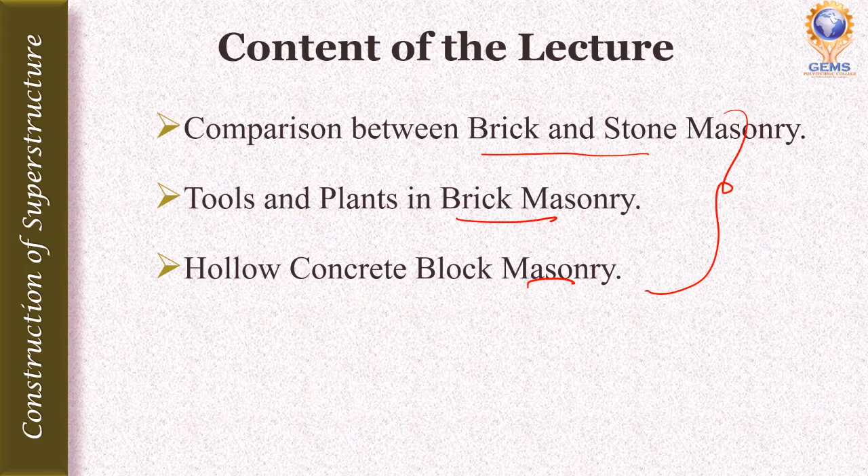First, we start with the comparison between brick and stone masonry. Brick masonries are of uniform shape and size, whereas stone masonries are not uniform in shape and size. Brick masonries are light in weight, but stone masonries are heavy in weight.

Bricks do not require any dressing, whereas stone requires dressing. Bricks are easily available, but stones are not easily available. We have to quarry them from the mountain and dress them, so this is a complicated process. Stones are not as easily available as bricks.

Laying is easy in brick masonry compared to stone masonry. If you compare, laying of brick is easier than stone masonry. But stone laying in stone masonry is not easy, it is a very tough one.

In brickwork, mortar joints are thin, but in stonework, mortar joints are thick. They are not thin, it is a thick mortar joint.

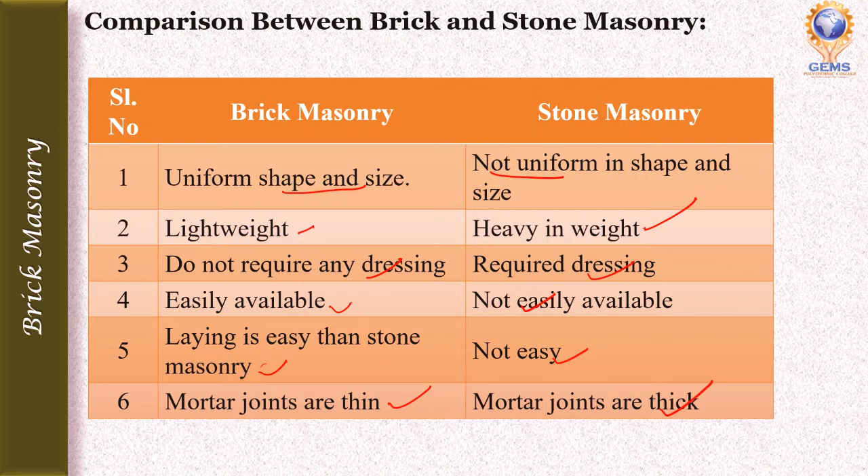Brick masonries are less watertight, whereas stone masonry provides better water tightness when compared with brick masonry.

Brick masonries have good fire resistance compared to stone. Stone does not have good fire resistance when compared with brickwork.

The cost of construction of brickwork is less, while the cost of construction of stonework is more. But brick is not much strong, whereas stone masonry is much stronger than brickwork.

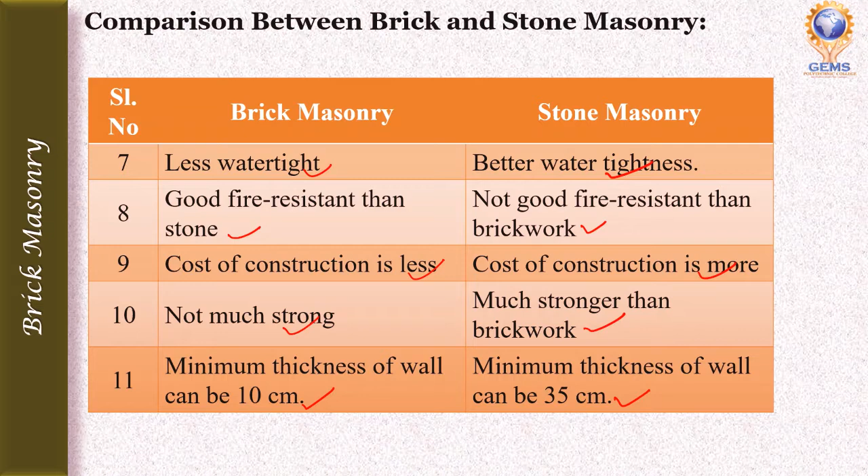The minimum thickness of wall in brick masonry can be 10 centimeters, whereas the minimum thickness of wall in stone masonry can be 35 centimeters. So these are the comparisons between brick and stone masonry.

Next heading is tools and plants in brick masonry. The first tool is the trowel, which is a triangular shaped tool, as shown in the diagram. The use of this triangular shaped tool is to pick up mortar from a board, and once picked up, to place and spread the mortar onto the brick or sets of bricks. We can also use the trowel to secure a brick into mortar by tapping. These are the uses of trowel in brick masonry.

The size of the trowel can vary, reaching up to 11 inches in length and 8 inches in width. Mostly, masons prefer to use short and wide trowels, since they do not put excessive stress on the wrist.

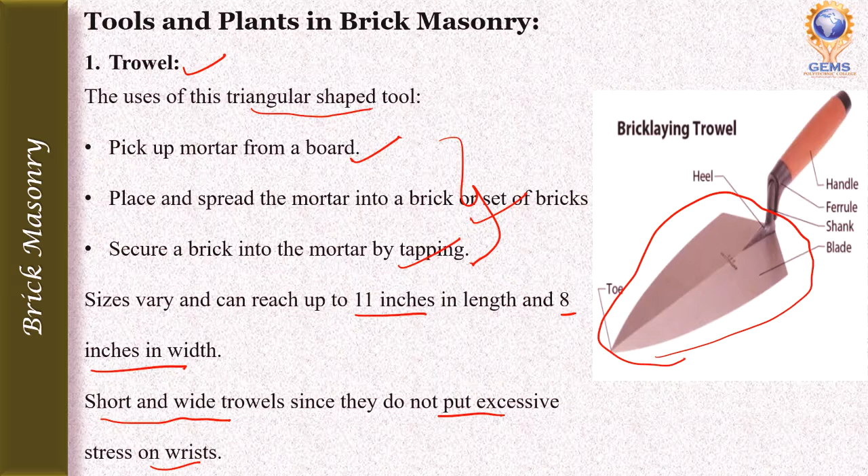The second tool is chisels. These chisels are used to cut the brick into specified sizes. There are wide ranges of chisels available, from 2.5 to 4.5 inches. The diagram shows the different shapes of chisels available.

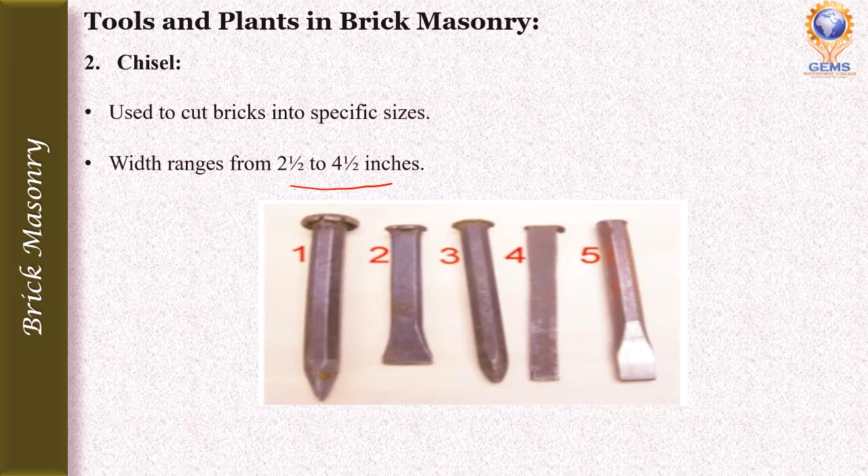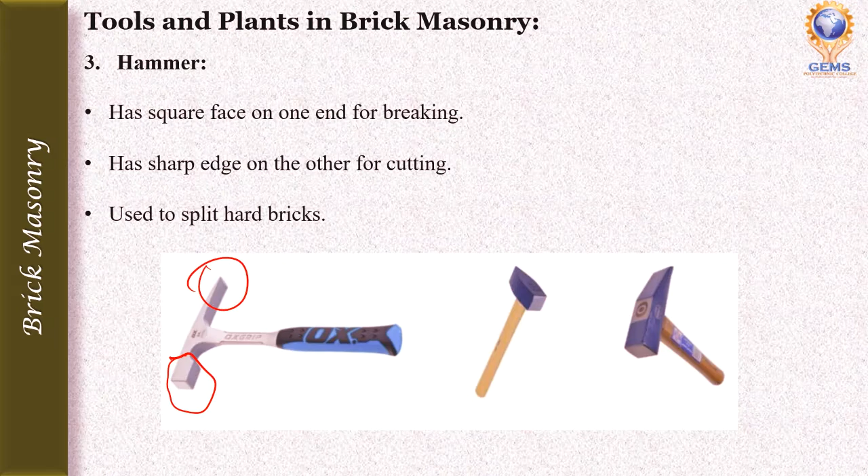The third tool is the hammer. A masonry hammer has a square face on one end, used for breaking, and a sharp edge on the other for cutting. Sometimes it is also used to split hard bricks. So this is the use of the hammer in brick masonry.

Next is the jointer. A jointer is used to make mortar joints. There are various types of joints: flat joint, point joint, and rounded joints. Its main function is to make mortar joints in brick masonry.

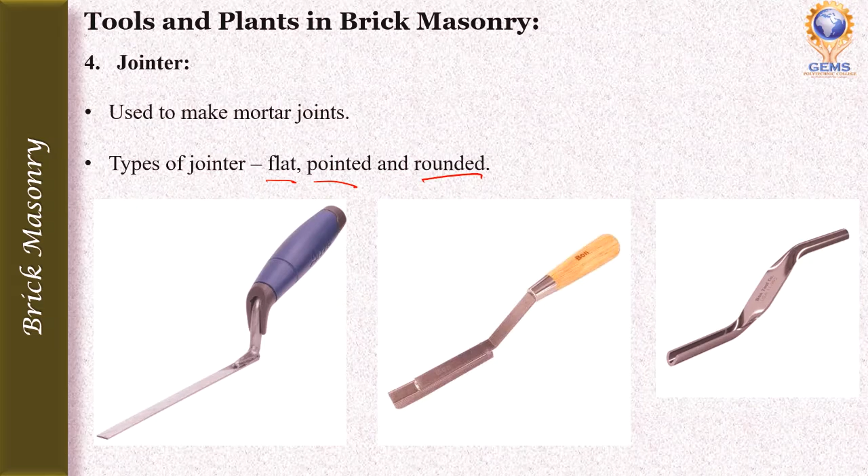Next is the square, a tool used when constructing and measuring right angles and for corner layouts. If you want to construct and measure right angles as well as corner layouts, you use this square. These squares are usually made of metal because of its durability. If made of plastic or any other brittle material, it will break easily. That's why squares are made of metal for durability.

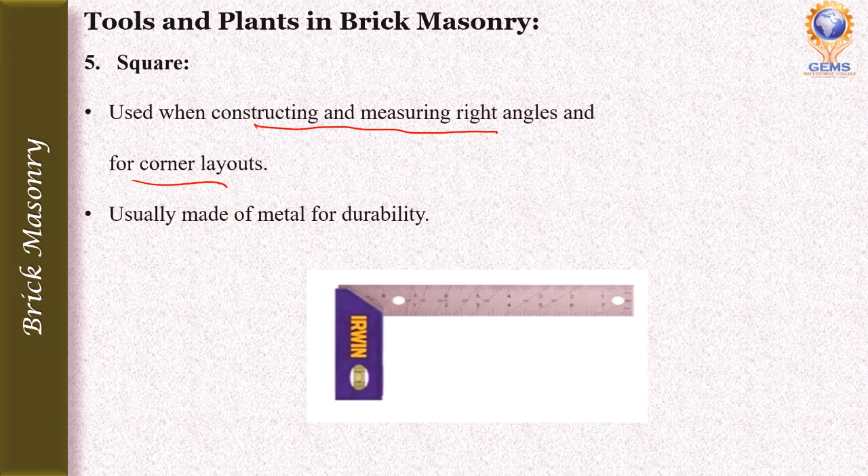The sixth tool is the mason's level. A mason's level is used to establish vertical or plumb lines and horizontal or level lines, such as when creating a vertical or horizontal line in a brick wall.

Mason's levels are made up of wood, metal, or a combination of wood and metal, and they come equipped with a single or double vial. This part is the vial, a small glass mold that consists of some liquid—mostly spirit levels.

The mason's level is preferred by most masons since it can be used for both horizontal and vertical measurements. Many masons prefer this level because with it they can measure both horizontal and vertical levels.

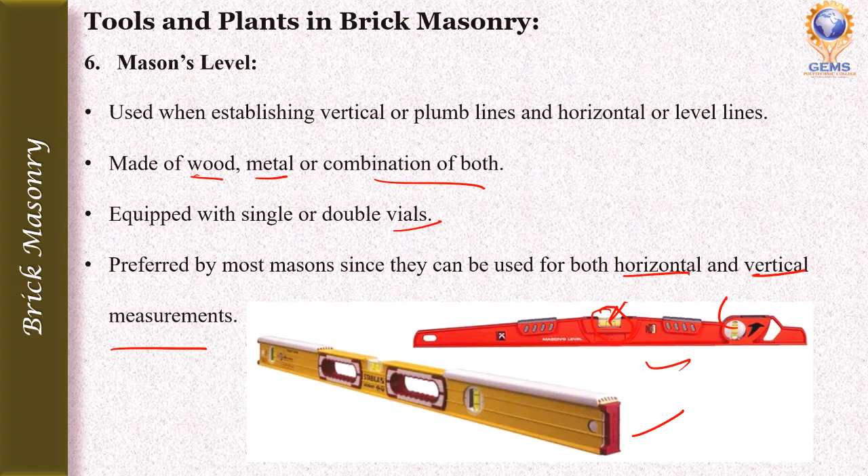The seventh tool is the straight edge. It acts as an extension to mason levels and is used when the level is shorter than the area that needs to be measured. So if you want to measure a larger area but your mason level is too short, you use this straight edge.

The width of this tool ranges from 1 1/8 to 1 1/2 inches, and it can be as long as 16 feet. This is the function of the straight edge.

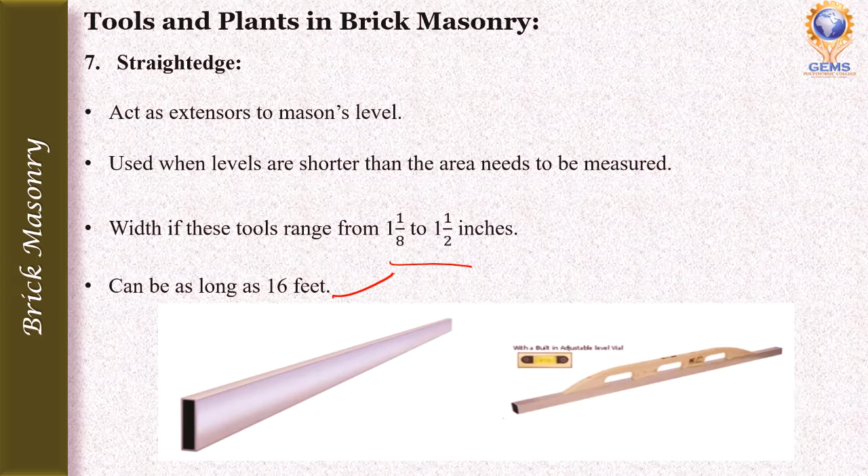The eighth and last tool is the plumb bob, also called the plummet. It is a weight, usually with a pointed tip on the bottom, suspended from a string, as shown here.

It is used as a vertical reference line, or plumb line, in the wall. This plumb bob is used to check the verticality of the wall—so if you want to check the verticality of the wall, you use the plumb bob.

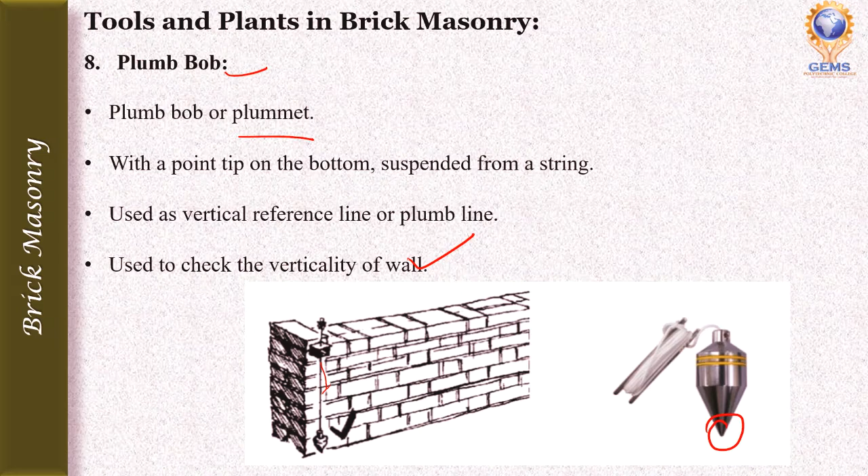So these are the tools and plants used in brick masonry.

The last topic in this video lecture is hollow concrete block masonry. We have all seen these hollow blocks in day-to-day life, and nowadays many buildings are constructed using them. It has a central hollow gap, which is why it is called hollow concrete block masonry.

A hollow concrete block is a large rectangular block used in construction. It is made up of Portland cement and aggregate, usually sand and fine gravel, for high density blocks.

This cement concrete is widely used for construction purposes due to its various advantages over other building materials. These hollow concrete units are manufactured from lightweight aggregates, so they can be used for both load bearing and non-load bearing walls.

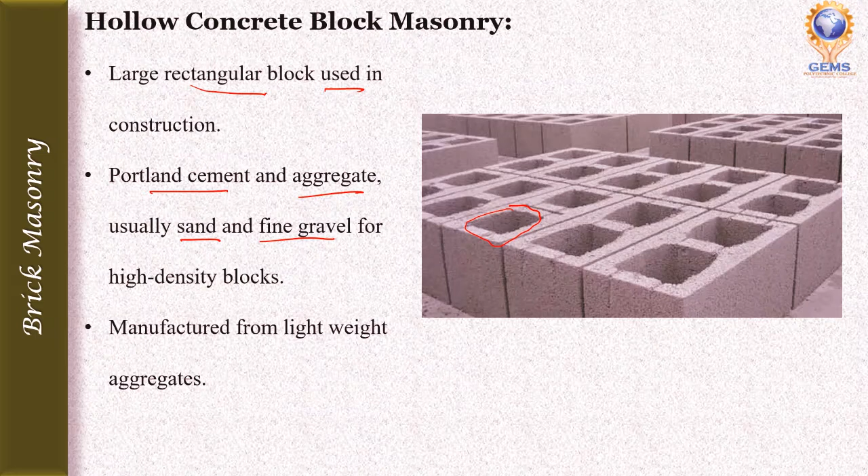The concrete blocks are molded in machines in various standard sizes. The standard size of a hollow concrete block is 39 centimeter by 19 centimeter by 30 centimeter.

If you are using a hollow building tile instead of a block, its size is 39 centimeter by 19 centimeter by 20 centimeter, with reduced height or thickness. If the same hollow concrete block is used for partitions, the thickness is reduced further to 39 centimeter by 19 centimeter by 10 centimeter. Only the thickness varies among the three standard sizes, not the length and breadth.

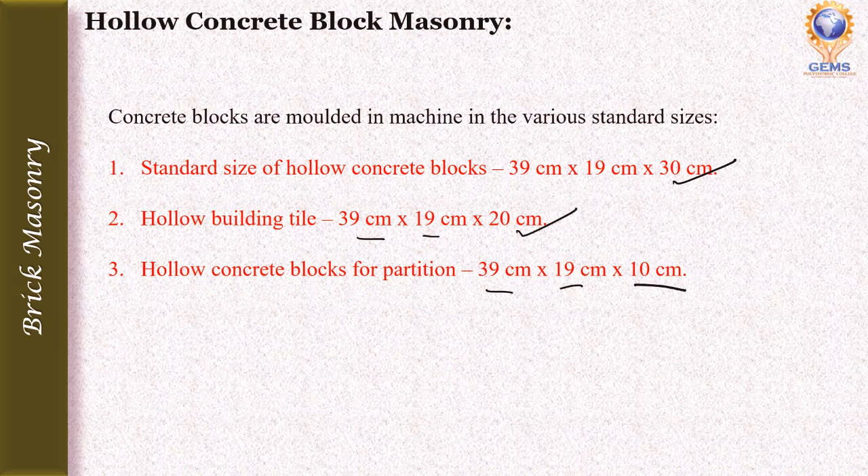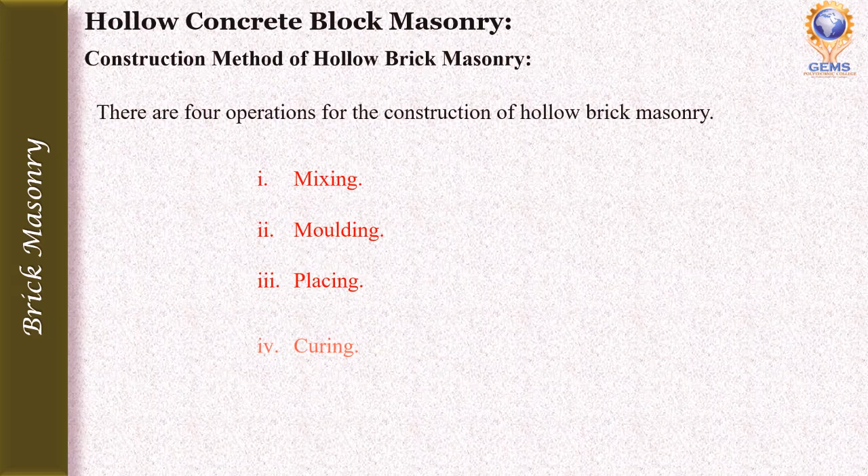What is the construction method of hollow concrete brick masonry? There are four operations in this construction: first mixing, second molding, third placing, and fourth curing. Let's see them one by one.

The first is mixing. In this step, we see how the materials are mixed to make hollow brick masonry: cement and aggregate are mixed properly.

So the ratio of the cement and aggregate should not be less than 1:6. So if you use 1 pot of cement, we have to use 6 pots of aggregate. We should not use less than a 1:6 ratio.

So in the aggregate ratio, the ratio of fine aggregate and coarse aggregate is 6:4. So 6:4 means we have to use 6 pots of fine aggregate and 4 pots of coarse aggregate. The size of the coarse aggregate is 6 to 12 mm only. If it is more than 12 mm, we can't use it in the manufacturing of hollow brick masonry.

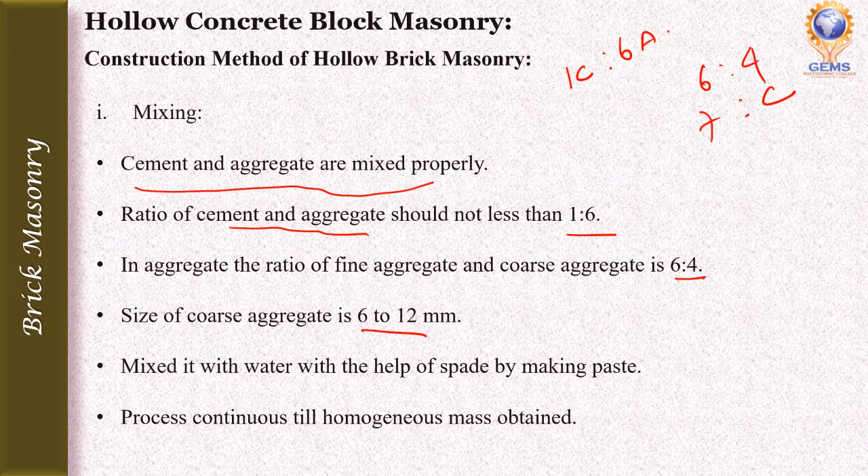Before adding water, the cement and the aggregate should be mixed properly with the help of a spade. Then we have to add the water into this mix of ingredients, and we have to properly mix it up to making them into a paste form. This process is continued till a homogeneous mass is obtained.

The second one is molding. So after mixing is over, the concrete paste comes under the next operation, that is called molding. So molding is done by hand casting or machine casting. Machine casting is preferable because it provides a better finish. So see in the picture, this machine is molding and placing the hollow blocks.

Okay. Third is placing. After molding, the concrete paste is taken out of the mold, and it is placed gently under shade without disturbance for 24 hours. We do not disturb this mold for 24 hours. We have to keep them in the shade.

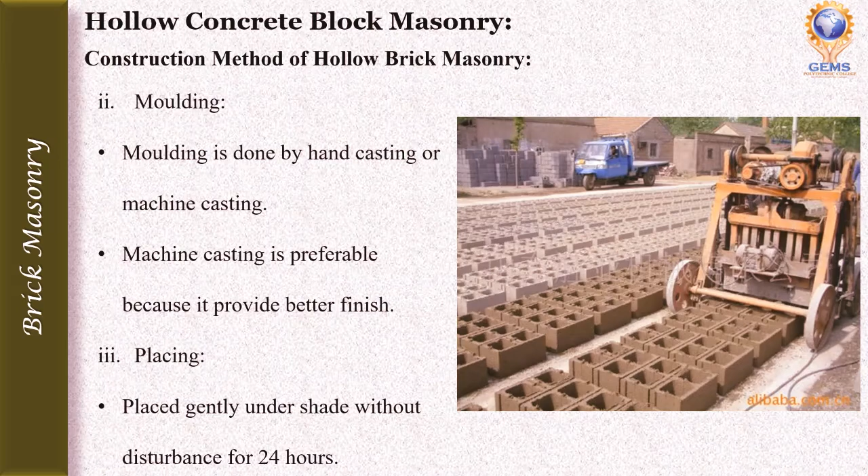After placing, we have to cure the hollow blocks. So after 24 hours, concrete blocks are soaked or immersed into water for a period of 1 week. So 1 week is the period for curing. Sometimes the curing is also done by pipes. The compressive strength of these blocks is 30 Newton per mm square after 28 days. So this is the compressive strength of the hollow concrete blocks.

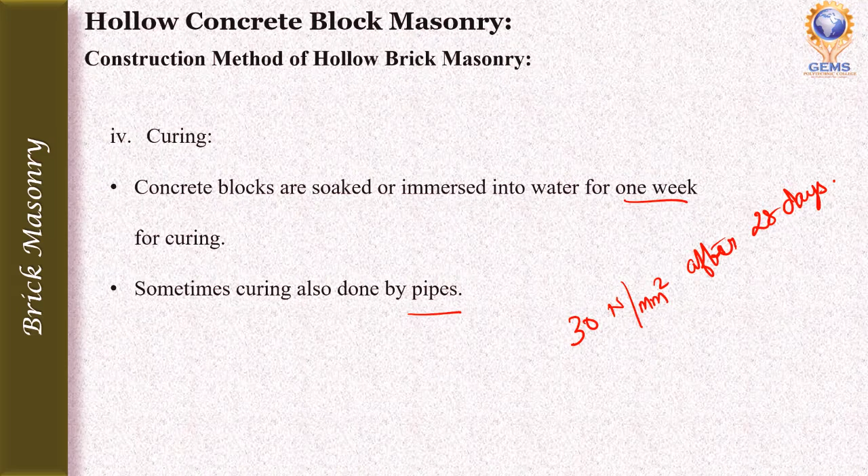So where are these hollow blocks used? These hollow blocks are generally used when the construction is required to be rapid, because these blocks' lengths are more than the size of the bricks and stones, so it requires fewer joints. So if you want your construction to be finished quickly, we can go with the hollow concrete blocks.

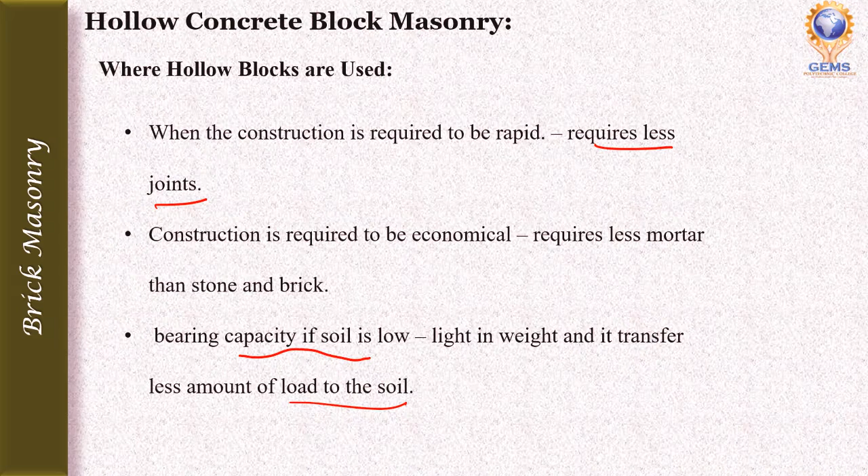And the second is when the construction is required to be economical. So if you want your construction to be very economical, then hollow blocks are used because they require less mortar than stone and bricks. Third one is when the bearing capacity of the soil is low, then hollow bricks are used because these hollow bricks are light in weight and transfer less load to the soil compared with bricks or stone. So in these three areas we will use the hollow blocks.

What are the advantages of hollow concrete block masonry? The durability and capacity to resist wear during handling is more when compared with brick and stone. The concrete block walls are stronger than brick or stone walls. And this concrete block wall saves binding material. It also saves the cost of labor. It has great resistance to fire and insects, and resistance to atmospheric influences, because concrete blocks are harder and denser than bricks.

Plastering can be eliminated because concrete blocks have the same color as cement plaster. So concrete blocks will have the same color as the cement, so we can eliminate the plastering work. The wall constructed with hollow blocks produces great insulation against heat, damp and sound. And these blocks are also advantageous for supplying wires and pipelines. So these are the advantages of the hollow concrete block masonry.

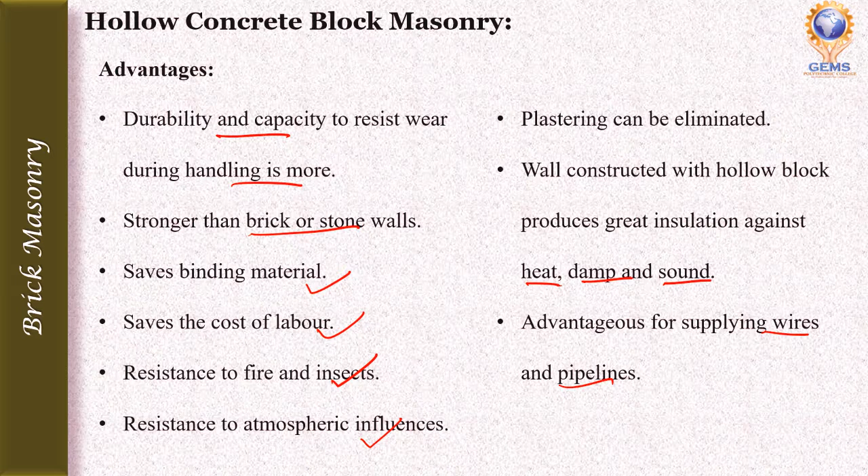So in this video, first we started with the comparison between brick masonry and stone masonry. Then we saw what tools and plants are used in brick masonry, and finally we saw hollow concrete block masonry: how we are producing the hollow blocks, where we are going to use the hollow bricks, and what the advantages of hollow brick masonry are. So these topics are covered in this video.